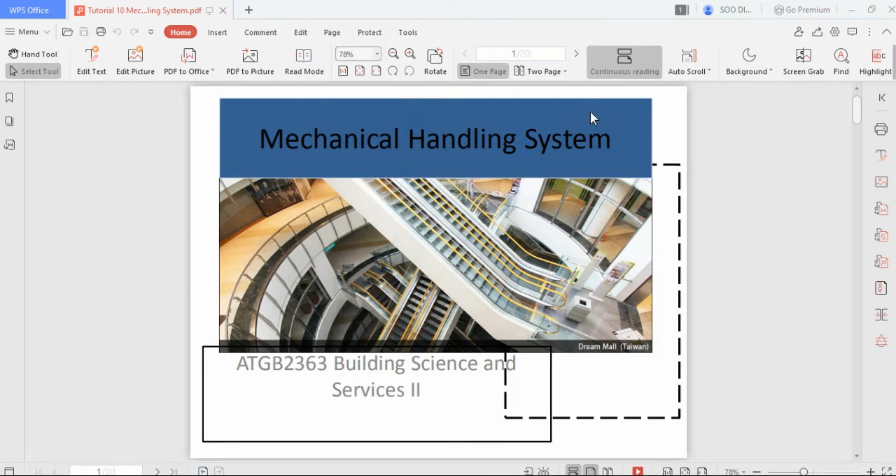So the first question is asking you to discuss the rationale of adopting a vertical transport system in a high-rise office. So why do you want to adopt a vertical transportation system in a high-rise office?

First of all, it's for the convenient movement of the occupants in the building. If you have a very high building, as the name implies, a high-rise office building - high as in 20 floors, 30 floors - if your working office or working space is located on the 20th floor, it doesn't make sense to have your employee walk up the staircase for 20 floors. It will not be very efficient and productive for them to go up to do their work and then come down for lunch and go up again for work.

So it's more convenient to adopt this vertical transportation system as opposed to having the occupant walking up and down the staircase. It's convenient and more efficient as opposed to us going up and down the staircase, or even to transport goods.

And because it's convenient and efficient, if you were to use it for a high-rise office building, then we are actually increasing the productivity of the office employees, so they do not need to move up and down the floors themselves, and it reduces transportation time.

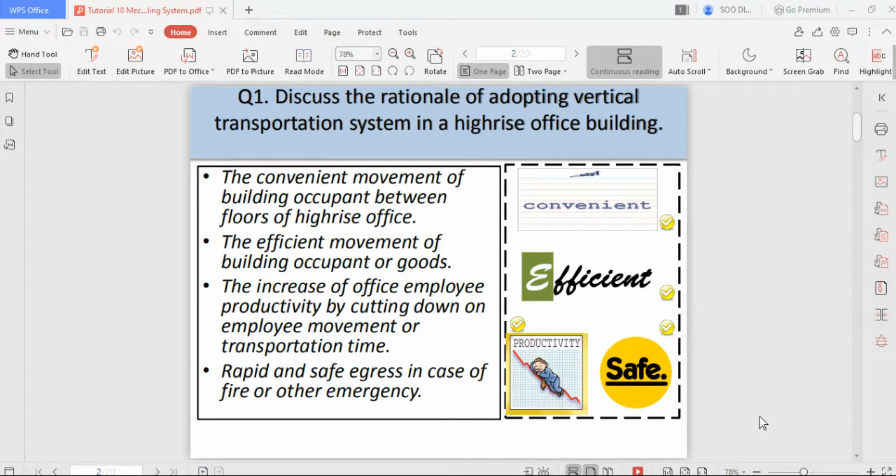Okay, so next question is to ask you to list and elaborate the three main expectations of a passenger lift. The three main expectations are: you want it to be safe, you want it to be comfortable, and you want the service time to be good.

So when you have a passenger lift, you expect it to be safe and comfortable when you are using it. And lastly, for the service, you expect the passenger lift to be available in a reasonable time, so you don't have to wait too long.

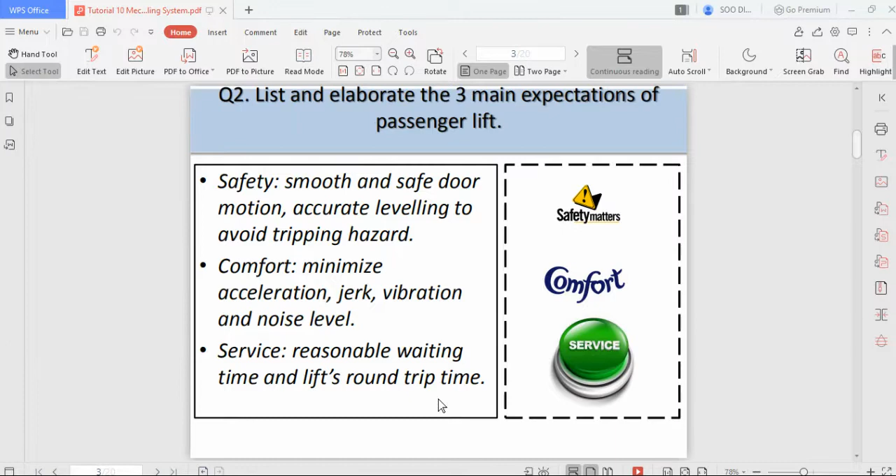Different types of buildings have different service times. For a residential building, you can allow the occupant to wait a bit longer, but for commercial buildings such as an office building, you need to reduce your service time. To reduce your service time, it might be a good idea to add more lifts so that you can transport more people up and down the floors.

Okay, so for the third question, it's asking you to explain the function of safety gear, counterweight, and buffer. Safety gear is in place in case anything happens to the cable - it will kick in and stop the car lift from moving up and down. Even if the car lift is moving too fast, it will also kick in. So it's a safety gear to hold the lift in place.

So instead of having the motor pulling or releasing the lift car's whole weight, you have a counterweight to reduce the weight of this entire lift. So this is the idea behind why you want to have a counterweight.

Okay, so at the end there will be a buffer. This buffer is there to just counter the lift when it's traveling down. When a lift is traveling down, the motor isn't actually doing much - the motor is just releasing the weight of the lift.

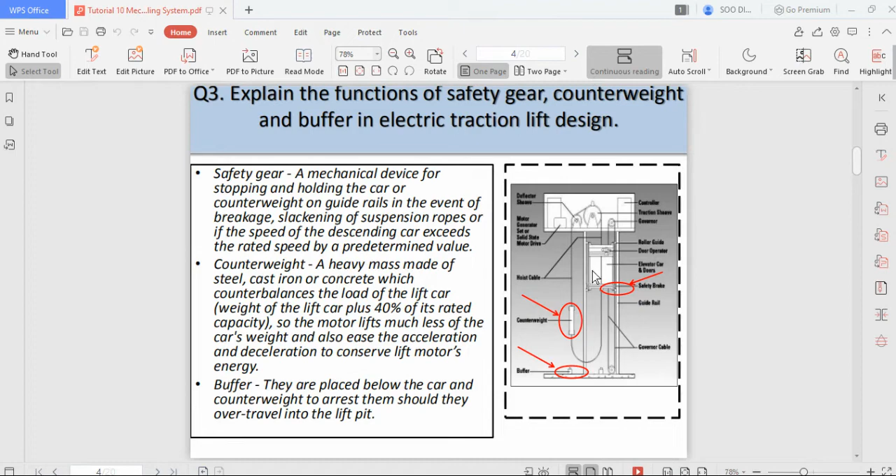Okay, so the next question is asking you to explain the common safety feature of an escalator. So we have our yellow line steps here. This yellow line step is to enable the user to visually see the edges of the step, so if you see that your feet is very close to the step, you'll be able to keep your feet away from the edges.

And then the second one is the brush deflector. This brush deflector is there to ensure that you do not stand too close to the edge of the steps. So what will happen if you stand too close to this edge is that because this is a moving part, a moving step, your shoe might get wedged in between the space there. It's a small space, but it does happen. There's accidents on this, that's why there's this brush deflector in place to prevent people from putting their feet too close to this edge.

Okay, so the next one, which is not so obvious, is the angle of inclination of this panel. It's to prevent kids from sliding down this handrail. Then the next one is the comb plate, which is to prevent anything from going into the machine room.

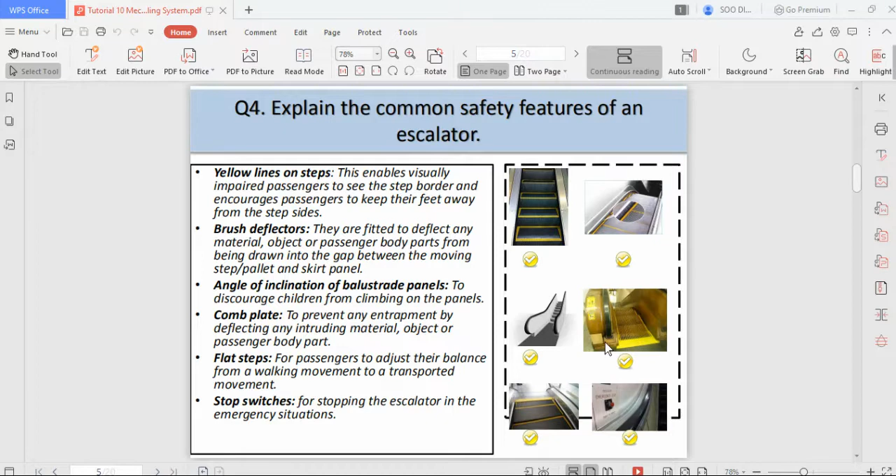Okay, so number 5 is asking you to suggest a possible measure to conserve energy of escalator. So one of the ways is to delay starting the escalator or travelator for as long as it is practical, and then to stop some of the escalator when convenient or after peak and normal working hours.

So what we will see mostly is we use an auto startup program on the escalator. This is the most common we see. So we don't see much of people stopping or delaying the escalator. For this one, it's a sensor type, so when people hop onto this escalator, then this escalator will start. During the time when there's nobody using it, it will be entering into an idle mode, meaning it's just waiting to receive the signal for people to hop onto this escalator or travelator.

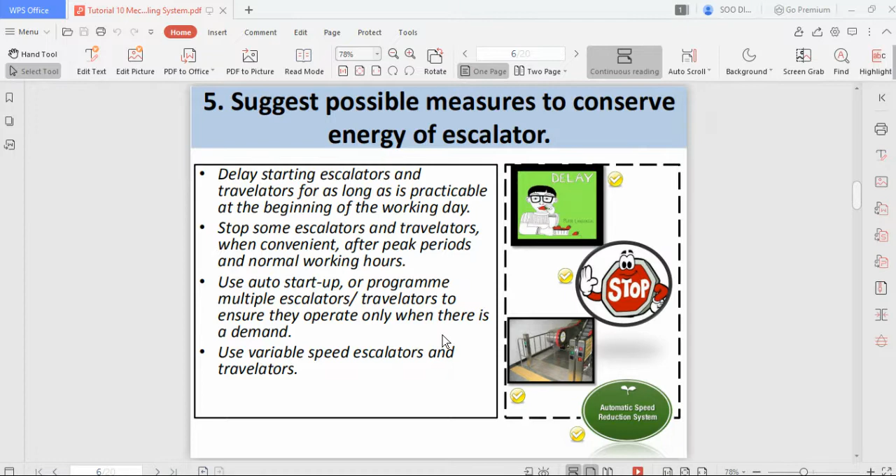And then once it senses that people are on the machine, it will automatically start and pump in power to operate the escalator. Lastly, it is to use a variable speed escalator and travelator. So out of all, the most recommended is to use a program to start an escalator or travelator. This way you'll be able to save a lot of money due to the escalator not needing to operate if there's nobody there.

Okay, so question 6 is asking you to analyze the advantages and disadvantages of escalator. So advantages of escalator is that it's able to move a lot of people. It's very good to use to guide and circulate people, and then they can be turned off and be used as a staircase. And if needed, they can be installed outdoor. So one of the two key points for escalator is they are able to direct the flow of traffic, and the next thing is they are able to transport a lot of people across a single floor.

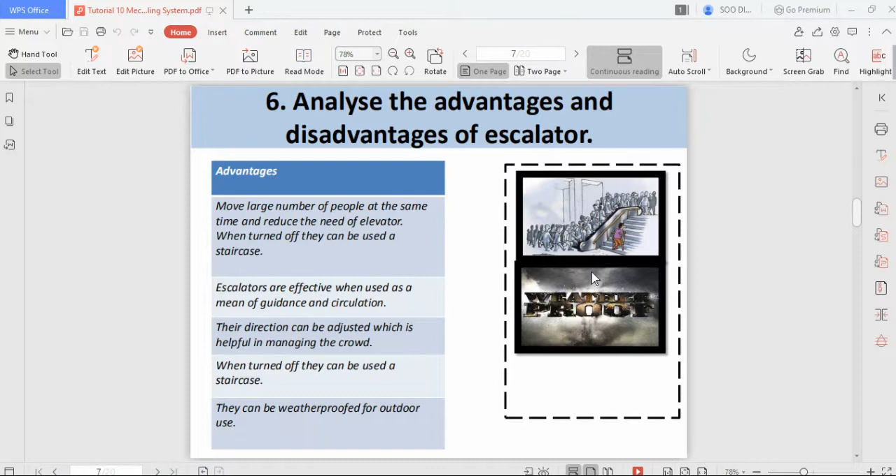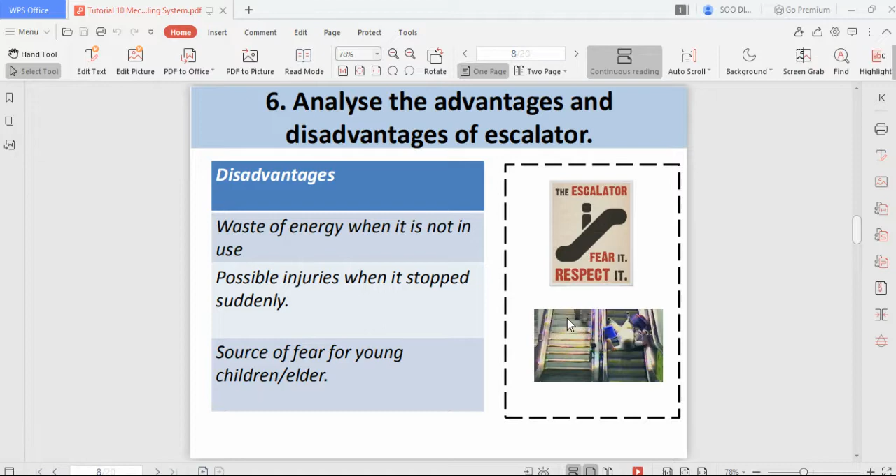But there are also disadvantages to the escalator. So if you're not using it, you are wasting the money. And then because it's a moving staircase up and down a floor, the possibility of injury is very high to children or elderly, or when it's stopped.

Question 7 asks to compare and contrast the difference between lift and escalator. In terms of speed, escalators are slower and elevators are faster. If you compare taking an escalator versus an elevator going up and down multiple floors, escalators are very good at moving a single floor, but if you go up more floors, the elevator wins against the escalator. Next is loading capability.

Escalators are ideal for moving between one floor, and they're able to carry a lot of people. But for a lift, you can only fit as many people as the weight allows. One good thing about lifts is they're able to travel fast, as I mentioned in the speed factors, for different multiple floors.

For electricity consumption, escalators eat a lot of energy because they operate continuously, whereas elevators consume electricity only when in operation.

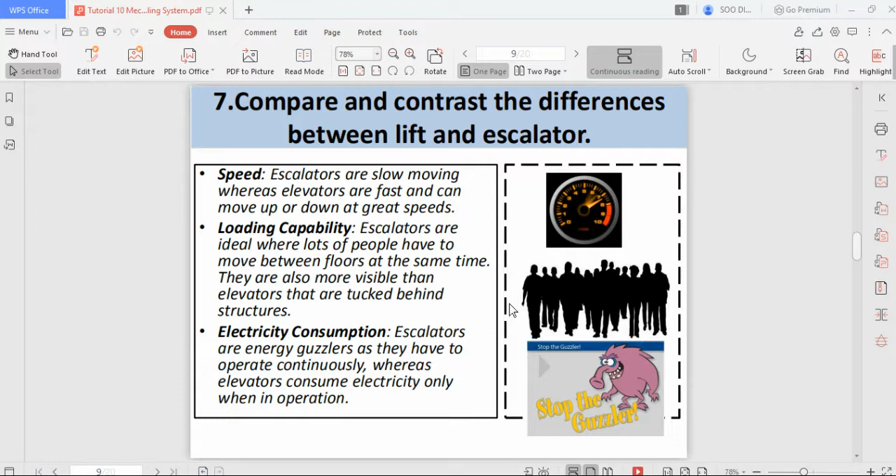Next question: explain the three main functions of a baggage handling system. In an airport, the function of the BHS, the baggage handling system, is to move the bag from the check-in area to the departure gate. You also have to move the bag from one gate to another during transfer, and move the bag from the arrival gate to the baggage claim area.

Conveyor is pretty standard. First off, you need to find out the capacity of a conveyor to convey the load, the type of belt you'll be using, type of driving pulley, type of idler and spacing, and the motor power.

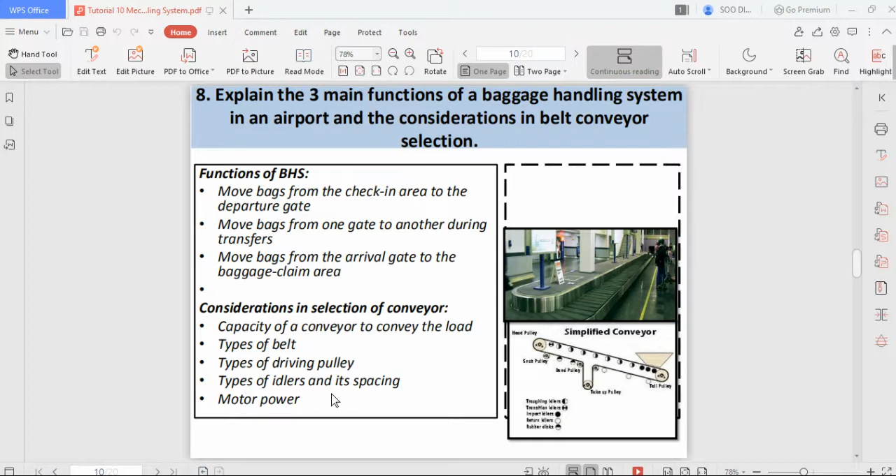This is the calculation question. You have a few formulas you need to remember, or since it's an open book class, you can refer to the formula. It won't be provided. The first formula is RTT, the second is INT, and the next one is HC, the handling capacity.

You have a group of 4 lift cars designed to serve 8 floors in an office building with a 3.2 meter floor height. It is required that the handling capacity is 80 persons in 5 minutes. The car has a rated capacity of 10, which is CC, the rated speed of 2.5 meters per second, and the performance time of 10 seconds.

This is the time. It's asking you to calculate the interval time, round trip time, and total handling capacity, and subsequently comment on the performance of this lift system. They've already given you the requirement, which is 80 persons in 5 minutes. The subsequent comment is whether all this given specification is able to handle up to 80 persons in 5 minutes.

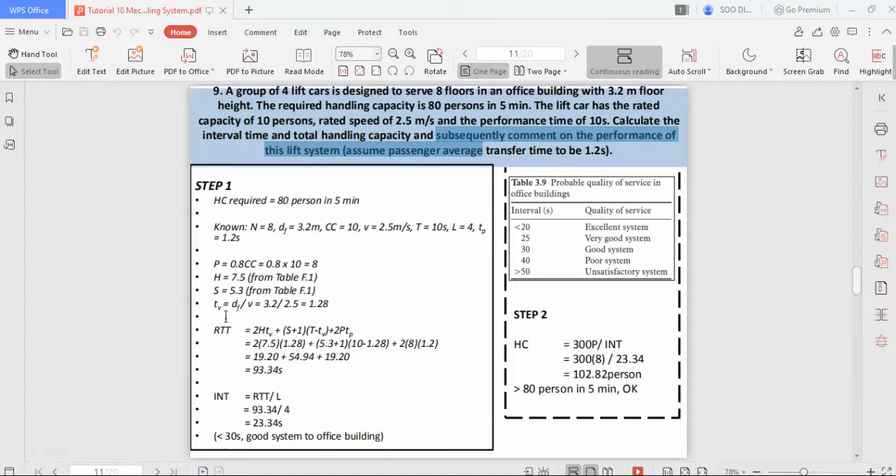You'll find that tv equals df over v, so tv equals 1.28. You sub all this information into the first equation, so your round trip time, RTT, will be 93.34 seconds.

Next, you want to find your interval time. This is interval time, which equals RTT divided by L, giving you 23.34 seconds. For an office building, this is considered good because it's less than 30 seconds.

Table 3.9 will be provided to you so you can compare whether it's good or not. Then lastly, you have HC equals this formula, which you use to check the handling capacity. We found out the handling capacity is 100 plus, which is more than 80, so for the comment, you just put 'OK' there. That'll be good enough.

This is table F.1. To extract the information, you know that your P equals 8, so you find P equals 8 here, then you have your number of floors.

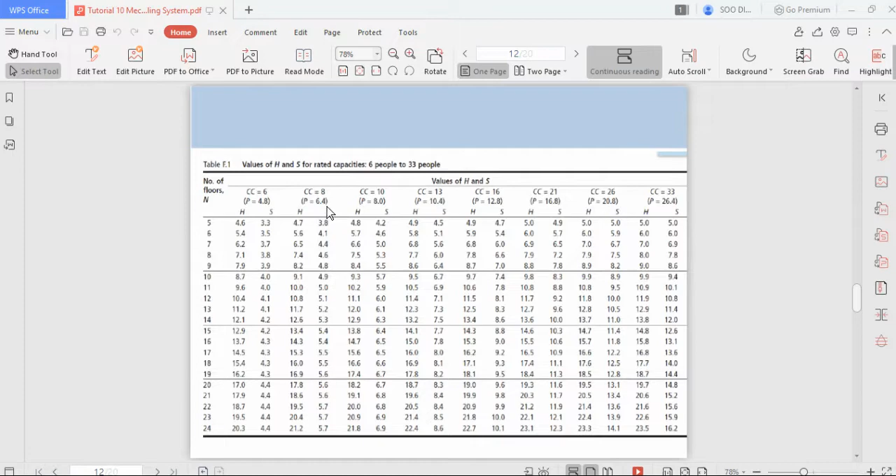So how many number of floor? There's 8 floors. So 8 and 10, 7.5. Your H is 7.5 and your S is 5.3. So this is how you get the H and S from the table F.1. You refer to your number of floor here and what is your CC. Your P you don't actually have to calculate, you can extract it from table F.1, but you just need to indicate that this is from table F.1.

So next question. A travelator was designed with 1000 millimeter width, so it's 1 passenger per step, a speed of 0.5 meter per second, and 400 mm tread. This passenger traffic at this travelator will be increased to 5,250 person per hour. You have to comment whether or not the design is able to fulfill the passenger traffic demand.

So this is a new demand, and this is all the information given. What you know is that v, the velocity, is 0.5 meter per second, and your length is 0.4 meter, and your p, passenger per step, is 1. This will be given to you, the passenger per step. It's required that the travelator is able to handle up to 5,250 person per hour. Because this is a travelator, you do not have any angle. If it's an escalator, then you need to use the formula and put in the cosine angle into your formula. This is derived from the formula in your lecture.

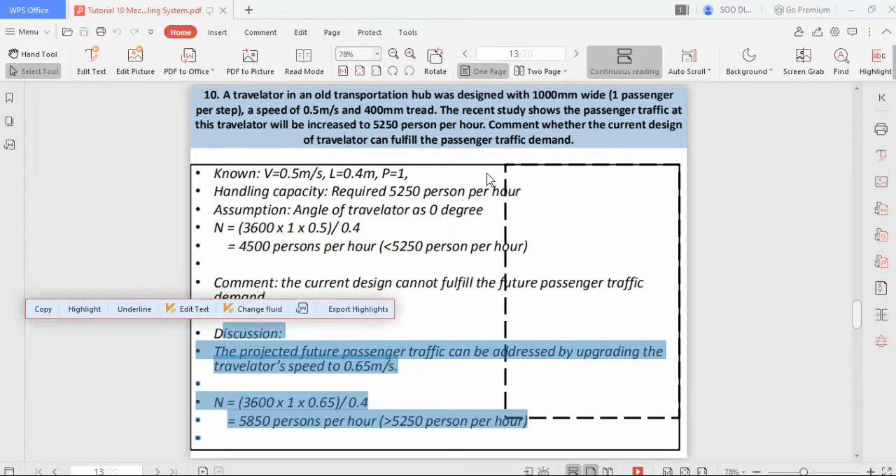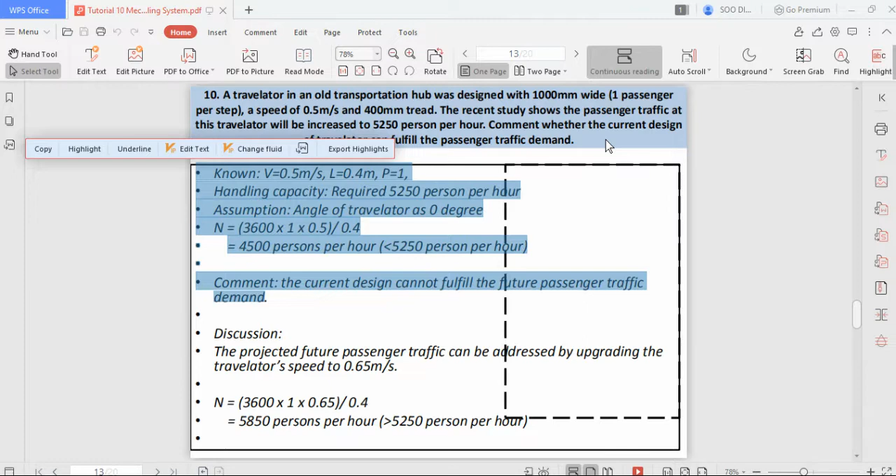This question did not ask you to fulfill it, but if the question did have additional instruction, then you have to fulfill it. In this case, the question did not ask you how to fulfill the passenger traffic demand, so you don't have to do it. It's just asking you to comment whether it's able to fulfill or not. Once you did until here, it's done. If the question has additional instruction saying that if the current design cannot fulfill the future needs of passenger traffic demand, and asks you to address the issue, then you have to do additional steps, which in this case you can just increase the speed of the travelator.

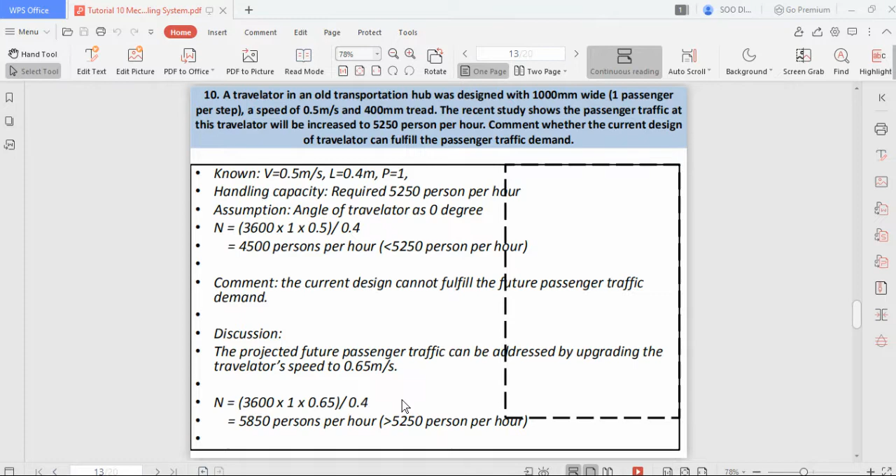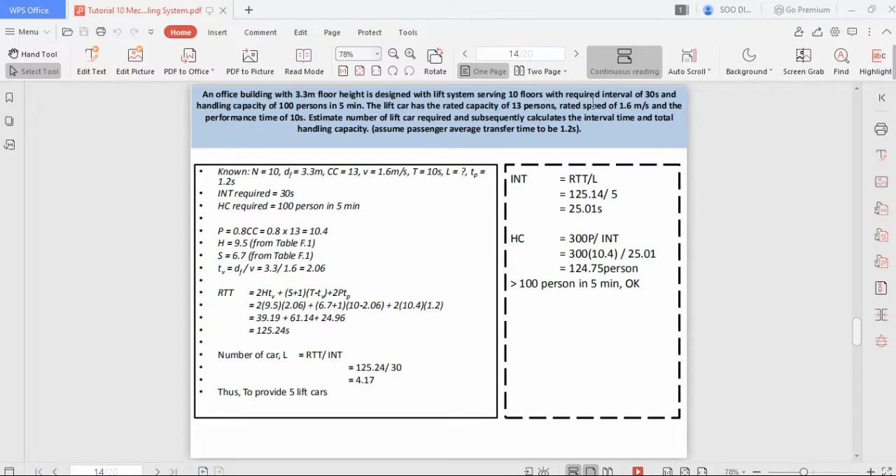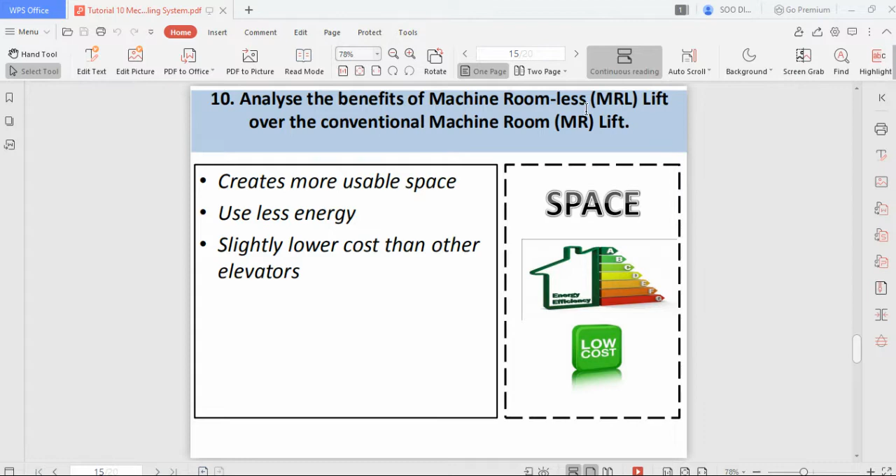Okay, so the next question is to state the difference between passenger lift and goods lift. A goods lift is designed to carry a very high load, while a passenger lift is designed to carry passengers.

Passenger load is very light as opposed to goods. Goods can weigh very heavily, up to 2 to 3 tons, depending on what sort of load you are loading.

Onto the lift. For a goods lift, considering the speed factor, because you're loading a very heavy load, and considering Newton's law, if you were to move something very fast, you need an opposite force to stop it. So that's why they have to operate at a restricted speed.

So it will provide minimum disturbance to the movement of the goods. For passenger lifts, you're able to travel faster because people inside the lift are able to balance themselves, but goods are not able to balance themselves.

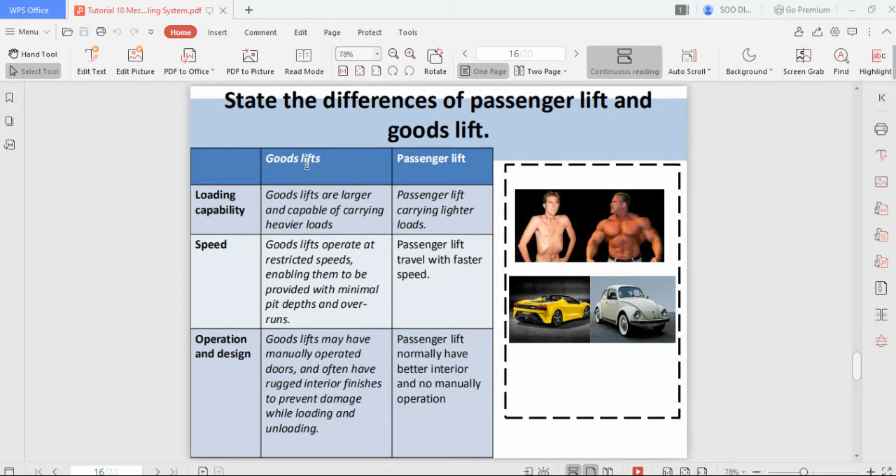Okay, so that's about it. Only three things: loading capability, speed, and operation and design. These are the three things that differentiate a goods lift from a passenger lift.

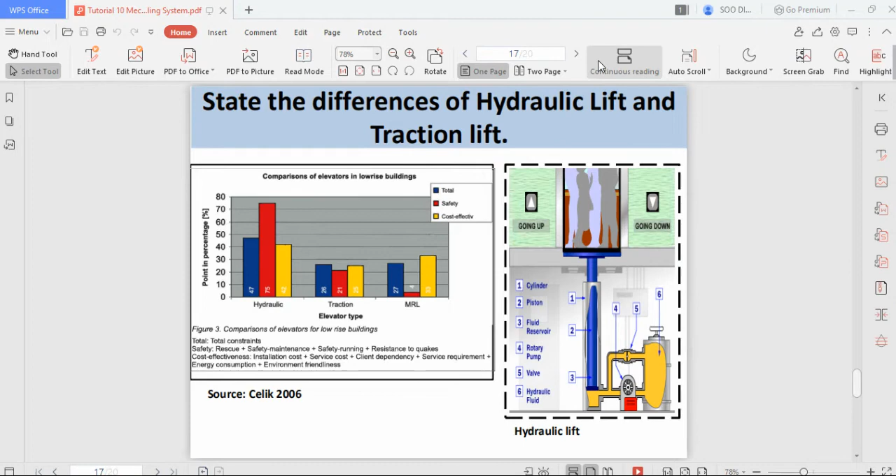Okay, so the next question is to state the difference between hydraulic and traction lifts. A hydraulic lift uses a pump to work against gravity to push the lift car up. When the car is descending, it's essentially just releasing the energy and letting the car descend on its own weight. A traction lift, which is what you've been studying this whole time, uses a counterweight and a motor to move the lift up.

In terms of speed, a traction lift can go faster than a hydraulic lift. A hydraulic lift's speed tends to peak at around 1 meter per second. This is due to the way hydraulics work—you're essentially using a pump and liquid pressure to push the car up, so you aren't really able to do it very quickly.

In terms of price, hydraulic is actually a bit cheaper, and traction is more expensive. For traction, you have a motor acting as a powerhouse to move your lift, but for hydraulic, you're just using a pump. There's a price difference between a pump and a motor—a motor usually costs more, hence why a traction lift is more expensive.

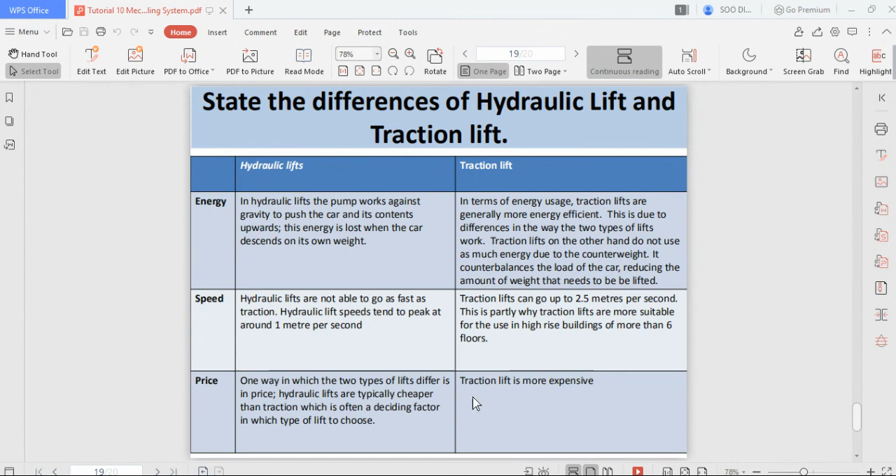Lastly, space. A traction lift previously took up more space, but now with the introduction of machine-roomless lifts, they are about the same as hydraulic lifts, though they will take a bit more space at the top of the lift.

For a hydraulic lift, it's usually suitable for places where you have a restriction of space. A hydraulic lift requires less service area for its components as opposed to a traction lift.

Operation-wise, a hydraulic lift gets power through an electric pump, which in turn transmits hydraulic fluid to a jack. This jack is what pushes the lift up and down a floor. For traction, we use a shaft and rope, with a counterweight to balance it and a motor to drive the lift up and down. So essentially, this is the difference between a hydraulic and traction lift.